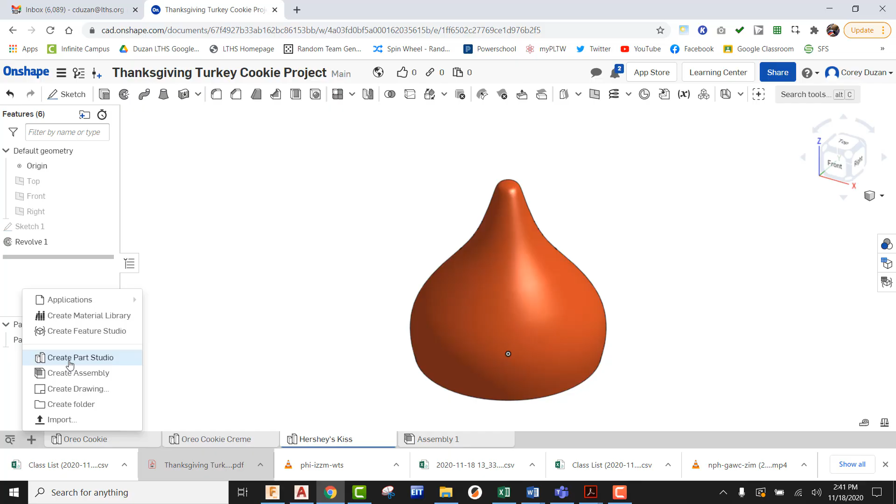So what we're going to be doing next is coming down, we're going to be picking on the plus sign. I'm going to be creating a new part. I'm going to right click on this part and do a rename, and I'm just going to be calling it candy corn. Okay, so once that's done, I can now go ahead and use sketch, pick on the front plane, and now look at the front plane in the view cube.

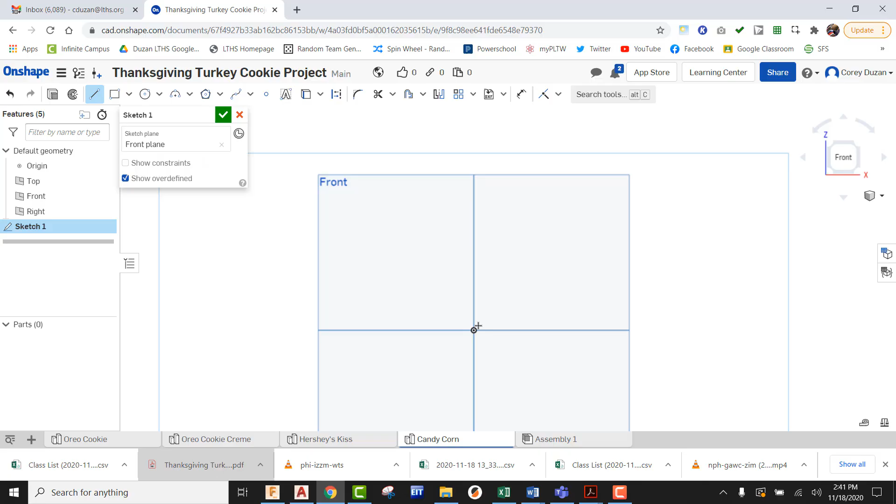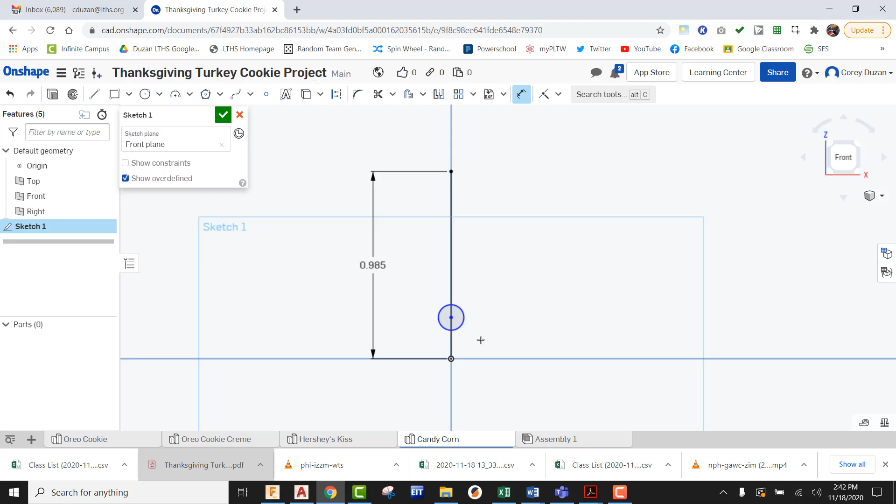All right, so a couple things we have to know is we're going to be drawing a line starting from the origin, and this is going to be coming up here to the top, and that's going to go up a distance of 0.985. So that's going to be the total height of our candy corn. Now I'm going to draw a circle on this line. Just draw it out like so. Our diameter on that circle needs to be a diameter of 0.2.

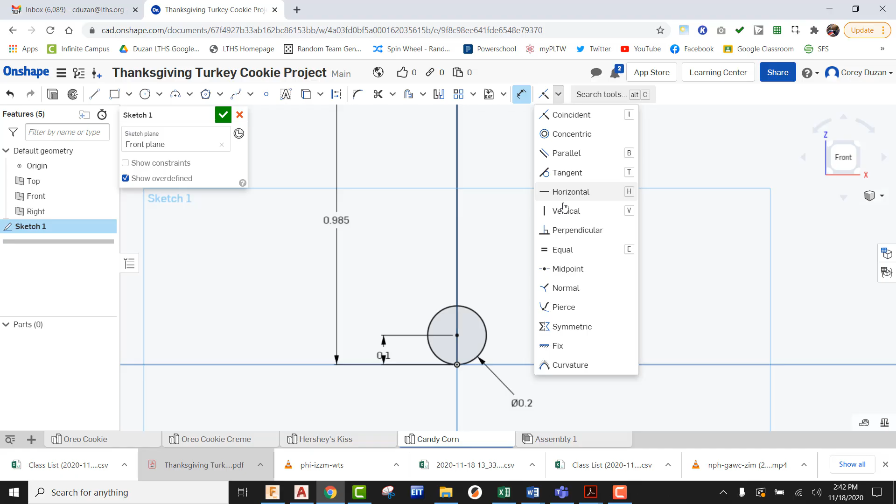So once I have applied the 0.2, now what I can do is dimension center point to the end point. And that needs to be a distance of 0.1, which is simply just the radius of it. So it's actually going to be bringing that circle all the way down to the end. Just for safe measures, I'm going to also do a vertical constraint between that center point and this end point, just to make sure that is locked in.

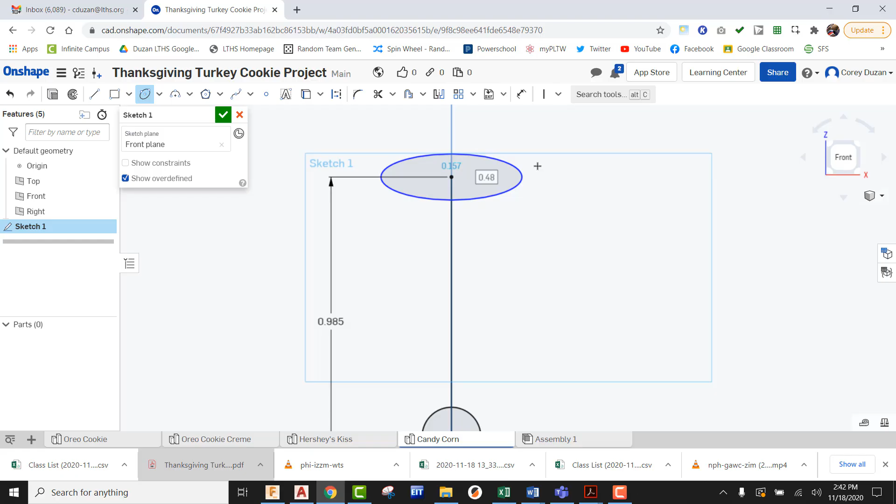And then now I can come up here underneath circle. I can find ellipse. I'm going to start my ellipse from the top of this. I'm going to just send this straight over, just like so. And I'm going to now dimension from this endpoint here to the endpoint of our ellipse. Actually, you know what I'm going to do first? I'm going to draw a line. We'll wait for the dimension here in just a second.

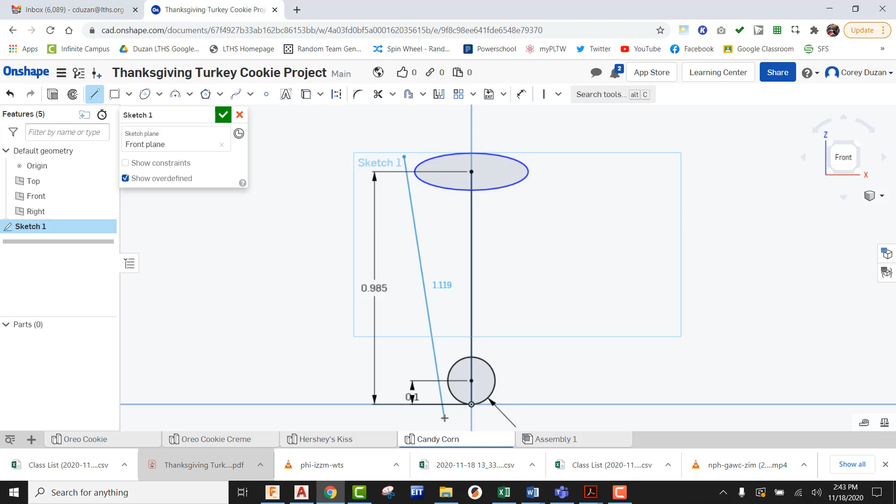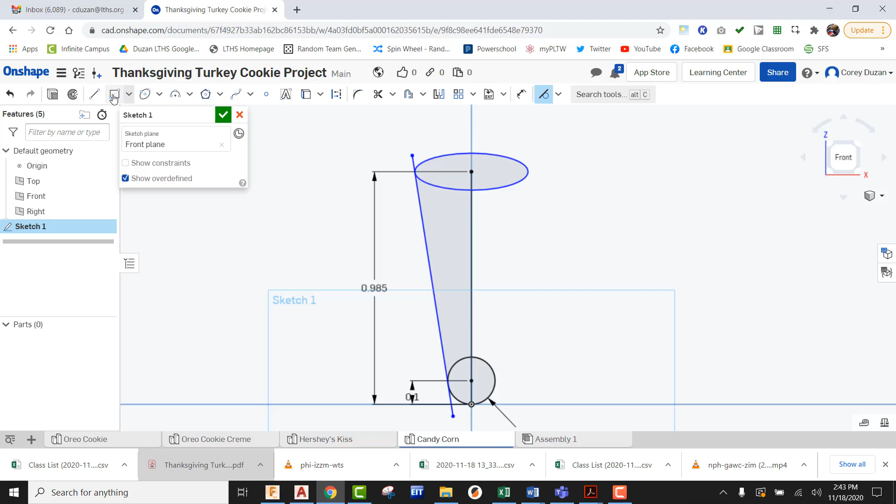Let's draw a line going from here down to here. I'm going to exaggerate it, which means I'm going to send it further than the actual shapes are. And now I'm going to come up here and find my tangent constraint, pick this line and pick this circle, and then pick this line and pick this circle. And now I'm going to draw another line on this side, exaggerate these, and go a tangent again between this line and this ellipse, this line and this circle. And now I can do a trim to trim these off.

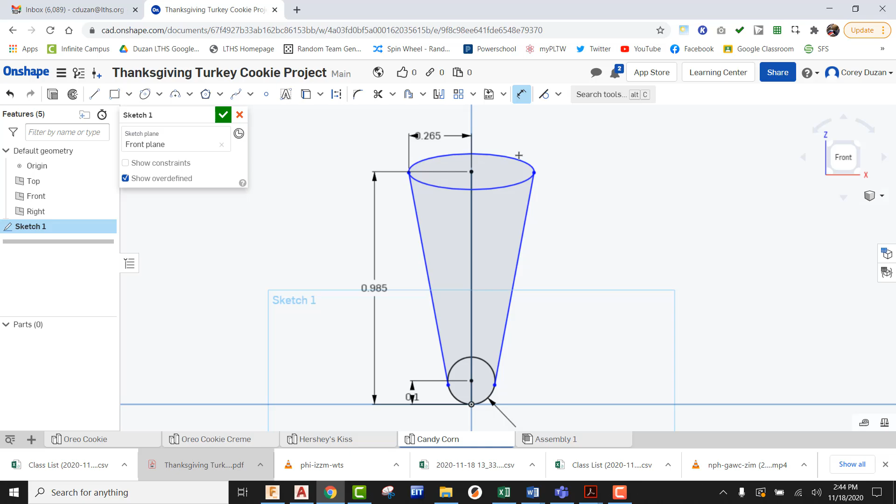Okay, so now that that is done, what I can do now is dimension. So I'm going to dimension from center point to this end point, and that needs to be a distance of 0.265. The other dimension I'm going to need is for this ellipse. If you just pick on the ellipse and pull it over, our total height. So this is actually going to be our minor axis distance. It's going to be a distance of 0.1. Okay, so that's giving me the shape I'm looking for. So now I green check this.

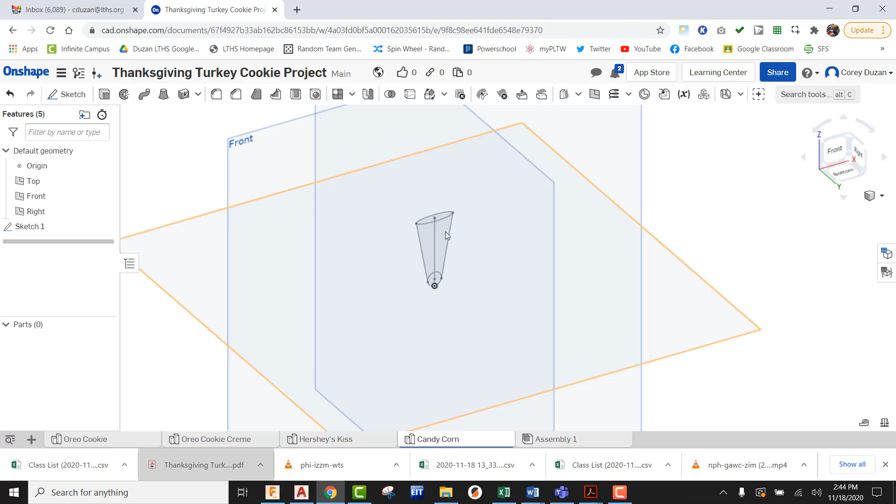I'm going to send this over into this view. And what I'm going to do is an extrude of all these profiles. I know that this is not a great way to extrude with so many different profiles, but I don't care. And I'm just going to give that a distance of 0.12. Looks like it missed it. 0.12. And I'm going to green check it.

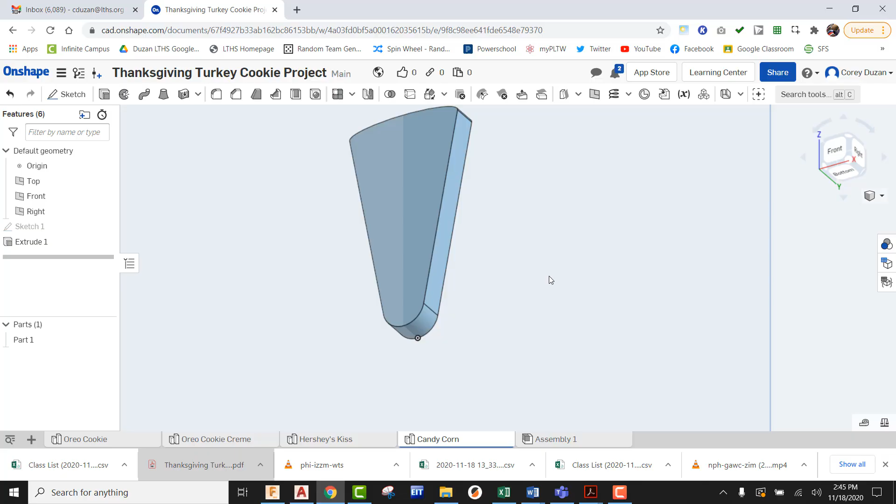All right, so it looks flat. And there's a reason why we kept it flat on this. It's just going to make it a little bit easier to assemble it when we put the tail feathers onto the back side of the cookie. Okay, now that we have that done, now we need to go and actually create this in 3 different sections so we can apply different colors to it.

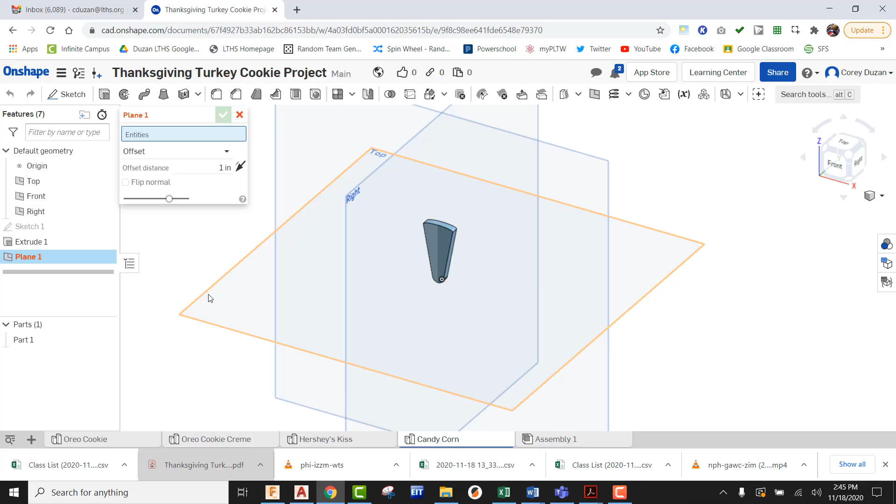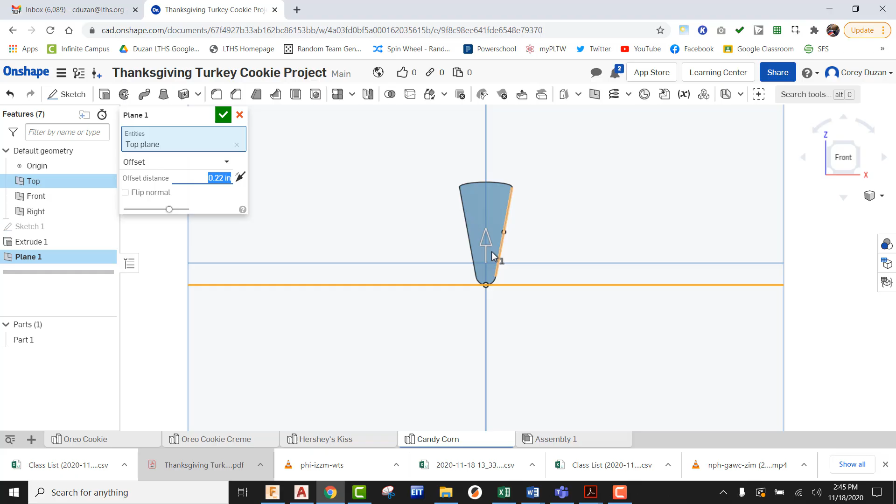So what I'm going to do is come up here, go to work plane. I'm going to pick on my existing top plane, and now we can see it's doing an offset. There's really no right or wrong dimension on this. Just take a look at the candy corn in front of you and determine where that white portion ends on the bottom. I'm doing that by picking on this arrow, pulling it up into the location I want, and I'll green check it. Then I'll look at this in an isometric view.

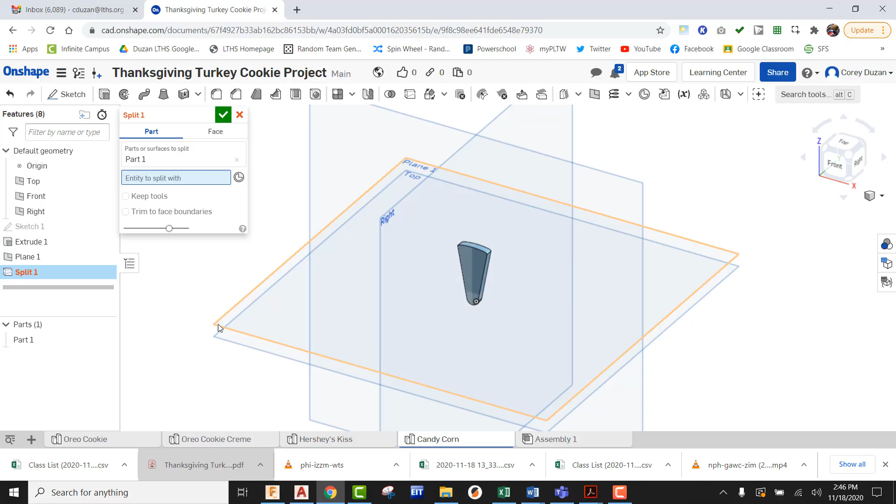I'm going to come up here and find the slice or split feature. I'll pick on split, pick on my candy corn, and the entity we're splitting with is going to be this plane 1 that we can see right here. When we do that, we can see that line is now there, which means it has taken this object and split it into two different parts.

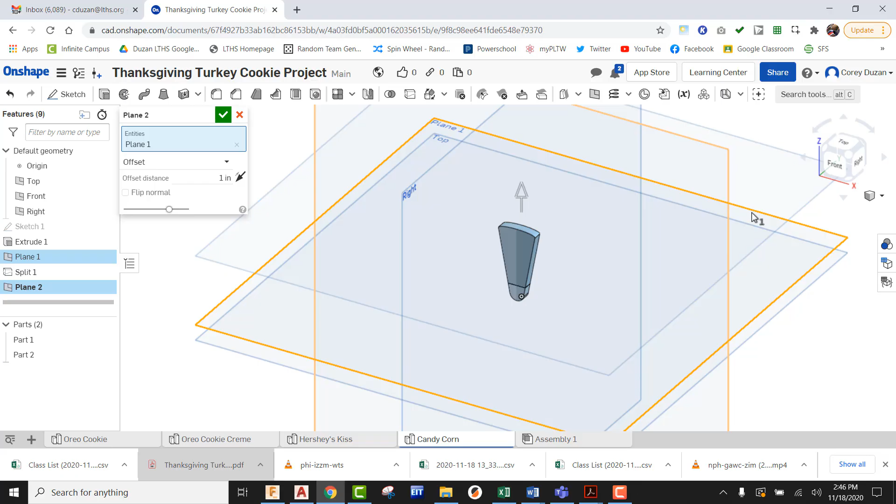I'm going to do the same thing again. I'll come to this work plane, and I'm going to be picking on the plane 1 I used earlier. We can now look at this from the front view, and I can take that arrow and drag it down into a location where I need it to be. That's going to be the top yellow portion of my candy corn. Maybe I'll drag it down just a little bit. I'll green check that and look at this in the isometric view.

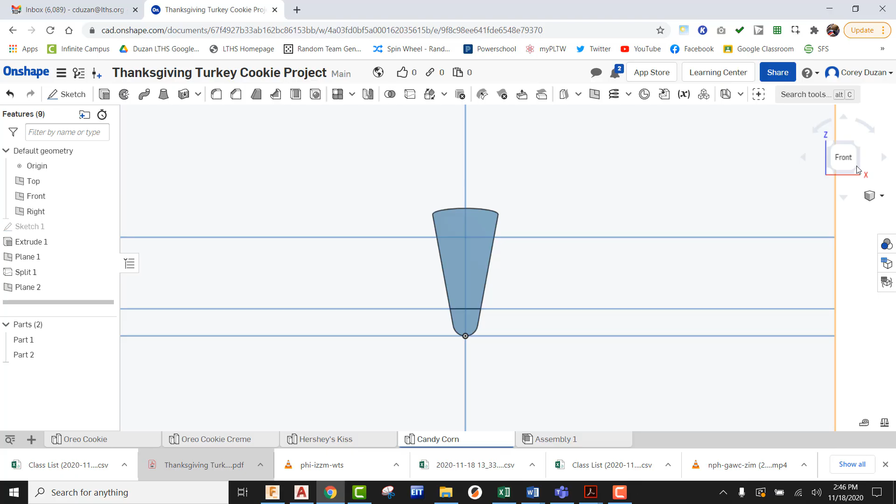Now I can come up here once again and use split. I'm going to grab my candy corn, pick the red box, and then come here to that last work plane we were using, and perform the split. To make things a little easier, I'm going to start shutting these work planes down, even the planes I created and offset earlier.

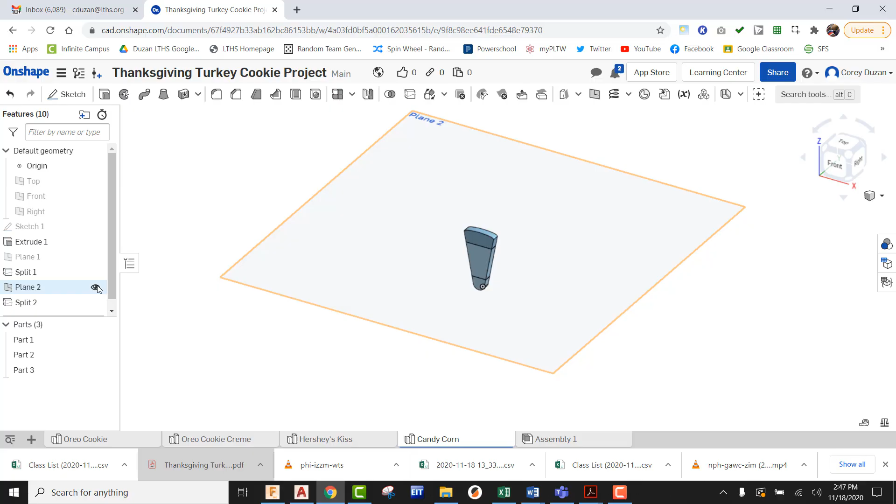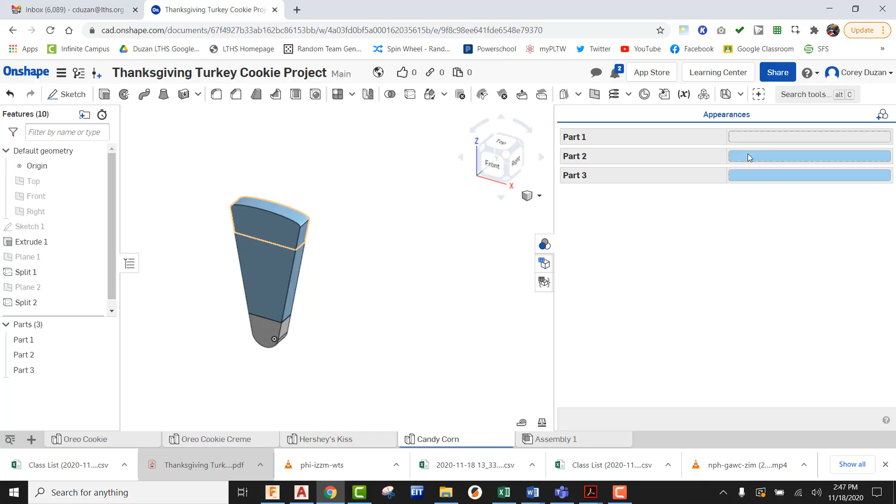Now I can start adding the colors I want. Coming here to the appearance panel, I can see that this is my part 1. We can see the bottom portion was just highlighted, so I'll double click on that. The bottom portion of a candy corn is going to be white, so I'll green check that. Part 2 is going to be the top, which we can see is highlighted. I'll double click on that and make it a yellow color, green check it. Part 3 is obviously our center, so I'll double click on that, find orange, and green check that. Now I can retract the appearance panel.

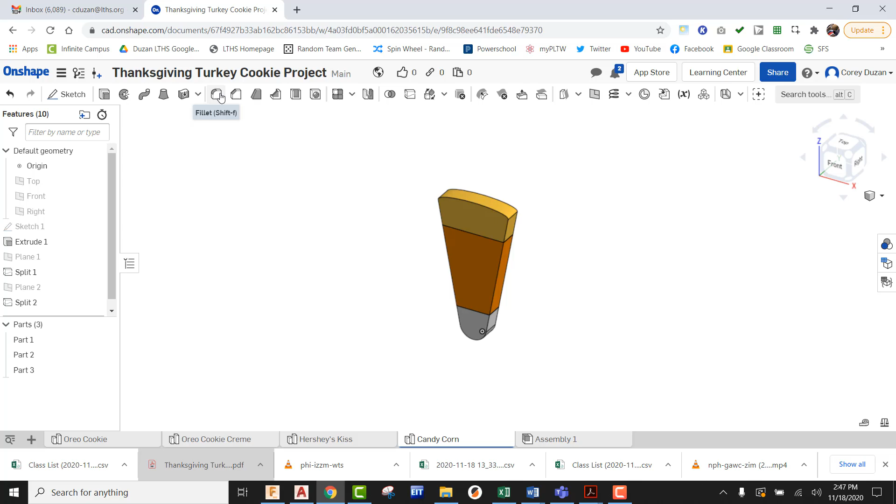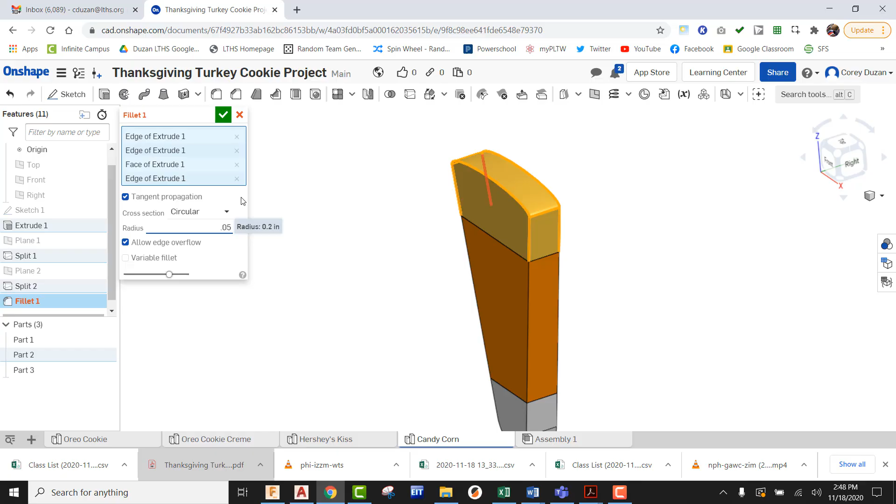That candy corn is basically almost done. The only thing we have to do now is actually add a fillet. The fillets we're going to be adding are going to be 0.05. If I come up here and pick on fillet, this isn't going to be perfect, but hey, we're going to make it work. I'm going to say it's this edge and this edge, this edge, this edge, this edge, this one, and we'll flip it over to the back. I think I have them all, but the distance needs to be 0.05. I'll green check that. Not perfect, but we're going to roll with it.

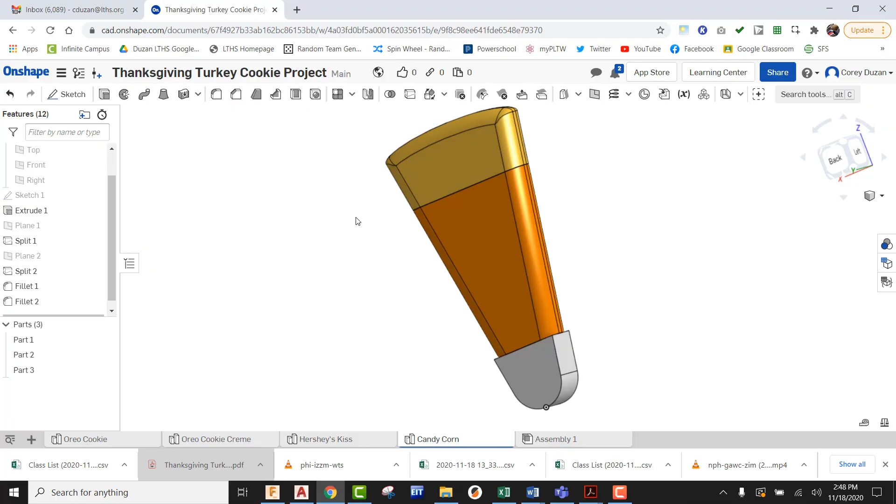So we're going to continue on with this. Let's do a fillet now on all 4 of these edges, applying the same radius, which is 0.05. I'll green check that. The last thing I need to do is come up here, pick on fillet again, and apply it to all these edges down here on the bottom, making sure that radius is 0.05. Okay, I believe we have that.

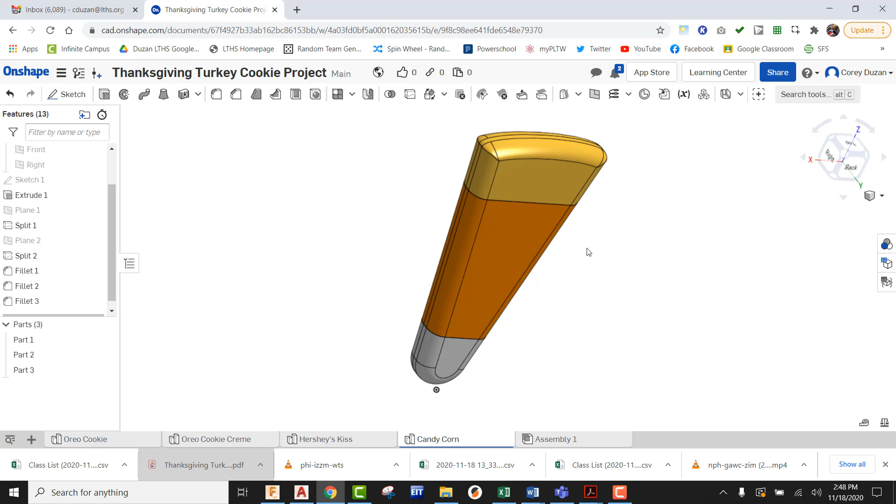And there you go. That is what we're going to call a candy corn, to use for the tail feathers on our turkey cookie.